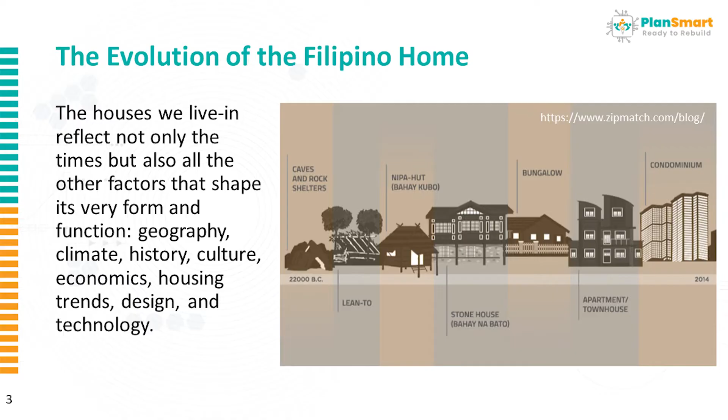Our homes today are shaped by different aspects of geography, climate, history, culture, economics, housing trends, design, and technology. For the caves and rock shelters, these were used by ancestors who moved from one place to another depending on the reason.

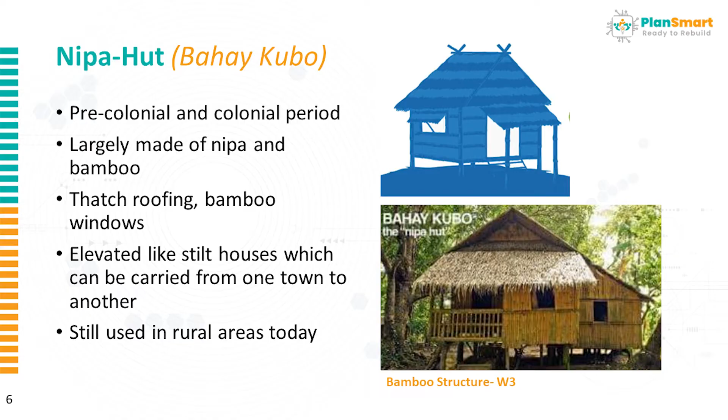The nipa hut or bahay kubo belongs to the pre-colonial and colonial period. The materials are largely made of nipa and bamboo with thatch roofing and bamboo windows. The bahay kubo is distinct because the floor is elevated from the ground like stilt houses, which can be carried from one town to another. It has a tall and steeply pitched roof ending in long eaves.

It has a silong to create a buffer area for rising waters during floods and to prevent pests such as rats from getting up to the living area. So even back then, our homes were already prepared for flooding. Oftentimes, the silong is used for storage, sometimes for raising farm animals.

The walls or dingding of a bahay kubo are designed for air ventilation. Since they're made of bamboo, the walls tend to let some coolness flow naturally through them during hot times and keep warm during the cold, wet season.

The bahay kubo has large windows to let in more air and natural light. They are designed as large awning windows, held open by a wooden rod.

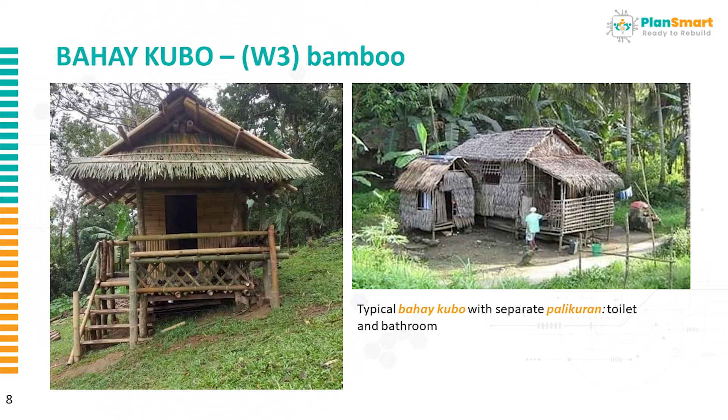A bahay kubo made of pure wood or good lumber can be considered a W1 type structure. Wood is the most common material in the Philippines since it is flexible, durable, and easy to source locally.

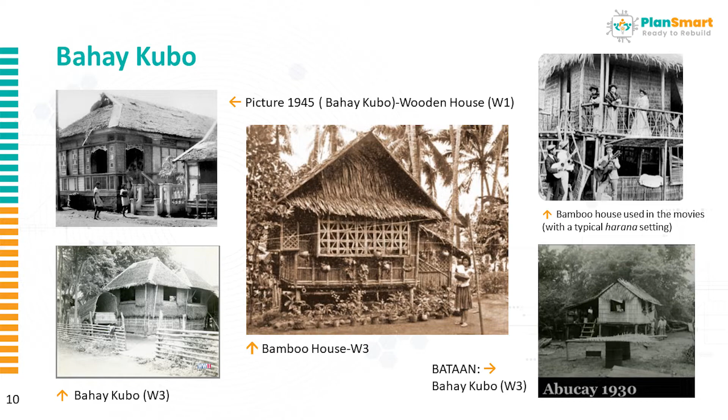Kaya naman ginagamit din ito as background sa mga pelikula, example makikita dito ay pelikula na nagkaroon ng harana o hinaharana yung dilag. Ang bahay kubo sa Abukay, Bataan, noong 1930, kung saan makikita ang pagbisita ng mga Amerikano at ang mga nasa bahay ay nakadungaw lang sa bintana habang nakikipagkwentuhan.

Stone house or bahay na bato. The arrival of the Spaniards in 1571 brought European colonial architecture to the Philippines. Gumagamit sila ng mga bato bilang pundasyon ng bahay at masonry stone or bricks bilang wall sa first floor, at kahoy naman sa pangalawang palapag. Ang bubong ay gawa sa tile at ang mga bintana ay gawa sa kapis shell.

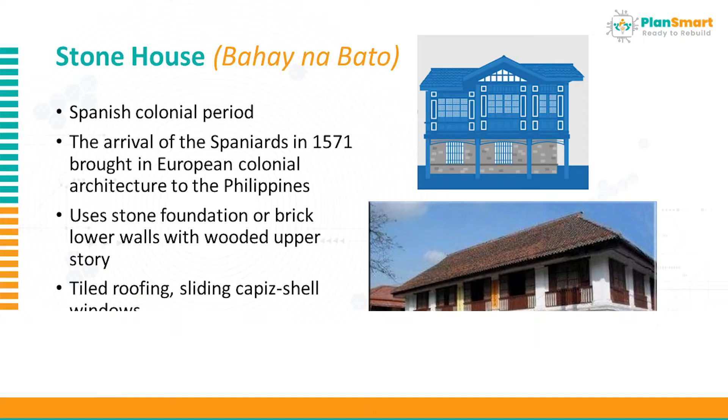Bahay na bato is also a symbol of status at the time, used by the local middle class and government officials. Spanish era, 16th to 17th century, bahay na bato is influenced by European style. Dinala yan sa atin dito ng mga Spaniards.

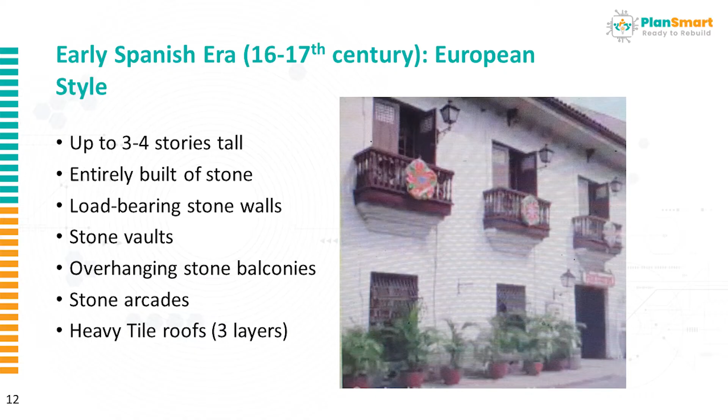Designed up to 3 to 4 stories in height, entirely built of stone, a load-bearing stone masonry walls with overhanging stone balconies, stone arcades and heavy tile roof, mga 3 layers yan. But the 3 to 4 stories European design na bahay na bato was not appropriate to the Philippine setting. Makikita yan sa paglindol noong 1645 with a magnitude of 7.9, triggered a rethinking of urban architecture and civil engineering.

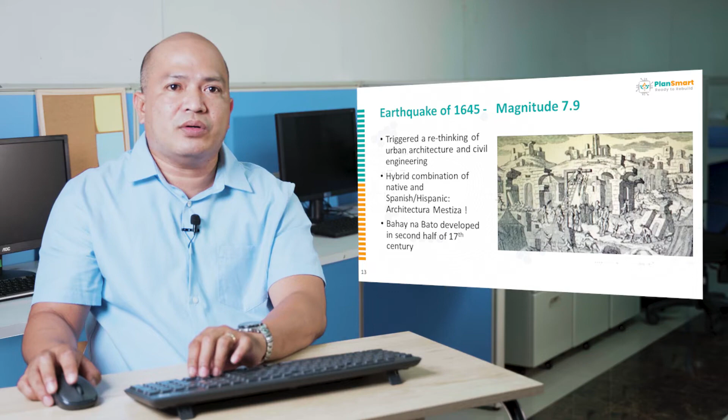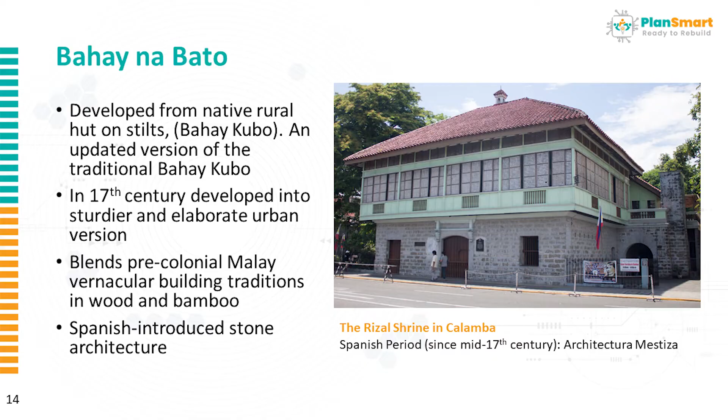A bahay na bato, redesigned, was developed in the second half of the 17th century. A bahay na bato that exists today developed from the native rural hut on stilts or bahay kubo concept. An updated version of the traditional bahay kubo in the 17th century developed into a sturdier and more elaborate urban version. So, the Spanish introduced stone architecture.

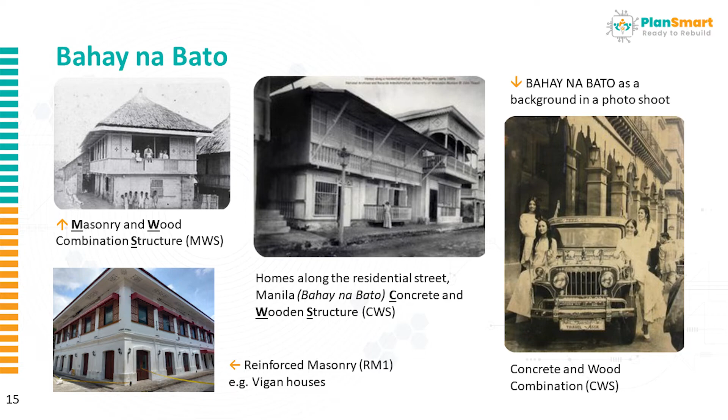Meron tayong mga strengthened masonry called reinforced masonry or RM1. Ang example niyan ay yung sa mga Vigan houses.

Bungalow is from the American colonial period, a low-rise structure with a pitch roof and horizontal in shape. Typically with metal roofing, galvanized iron or GI, cemented walls, and has its own gate for security. It may come with a yard, a garden, and a parking space.

The bungalow is the most common type of house in the Philippines. The design is also perfect for the elderly because it is small, easy to maintain, and does not have flights of stairs. It comes in different forms in different provinces across the country. So ganito ang mga common na bungalow dito sa Pilipinas.

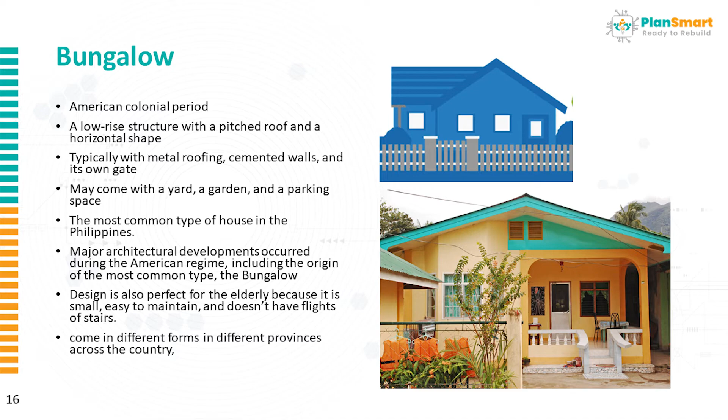The basic elements of a bungalow are gable roof or aguas. Meron dyan media aguas, cuatro aguas, mga high-end subdivision. Truss or yung

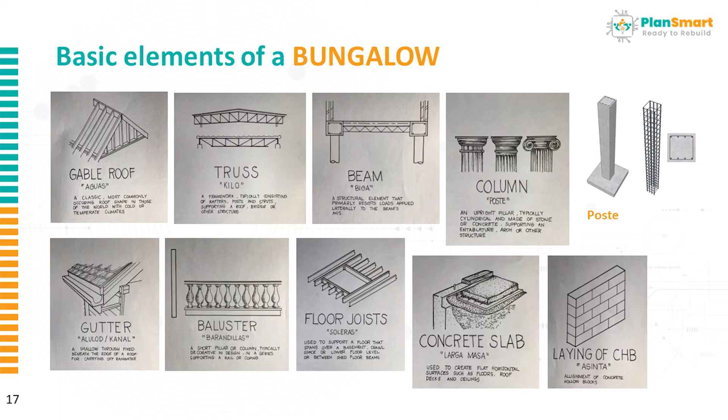ginagamit sa bubong or kilo, beam or biga, column or poste, gutter or alulod or kanal, baluster or barandillas, floor joists, concrete slab, at yung wall ay yung tinatawag na concrete hollow blocks. Sample of bungalow, if it's a wooden house, is W1.

A wood house is perfect for country living. It gives you an image of growing your own garden in a gorgeous setting. Sample of a bungalow for a wooden house, W1 and W2. Marami pa rin sa probinsya yung ganito, wooden house, 2-story, at yung mga elevated wooden house natin, W1. Influence ng Americans ay yung mga rustic home, W1, or cozy bungalow house.

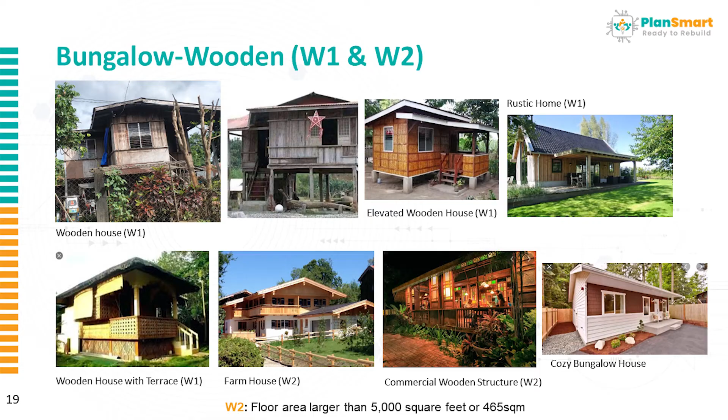Kapag naging W2 ang wooden house, the floor area is larger than 465 square meters, or ginamit siya for commercial or wooden structure. Sample of bungalow, reinforced concrete houses.

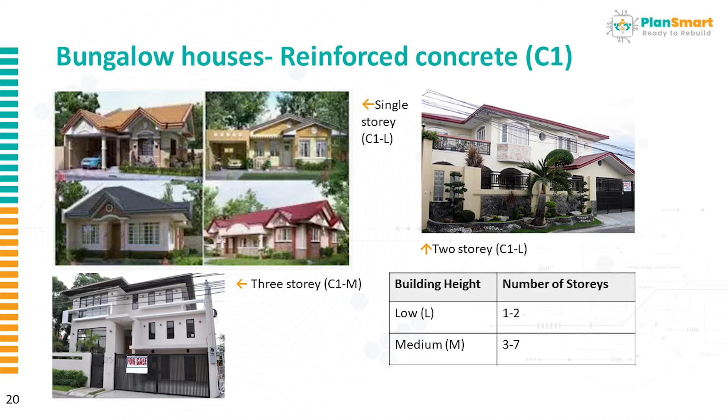Meron po tayong mga single story, common po yan sa mga subdivisions, iba't ibang design, iba't ibang kulay. Single story is C1L. Meron din po tayong tinatawag na 2-story, C1L. Ibig sabihin ng L ay low-rise, or 1 to 2 stories. Meron din po tayong 3-story, which is already C1M.

Sample of housing development, residential. Iba't ibang uri po yan. R1, economic housing, single detached.

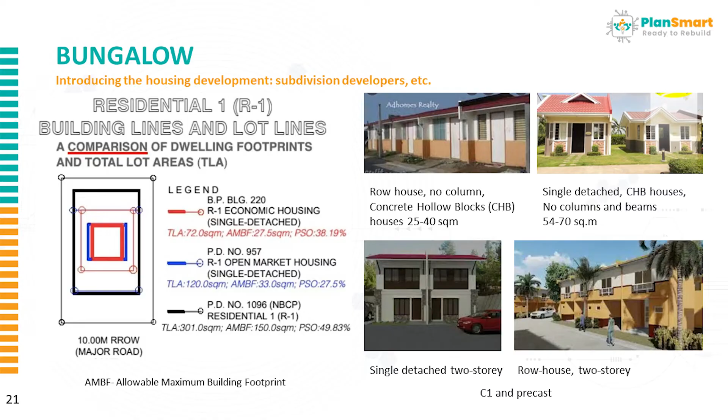The total lot area is 72 square meters, and the allowable maximum building footprint is 27.5 square meters. We also have PD Number 957, or R1 open market housing, single detached, with an allowable maximum building footprint of 33 square meters. And there's Presidential Decree 1096, or the National Building Code of the Philippines for residential, with an allowable maximum building footprint of 150 square meters.

That's why before, we could still see many large lots here in Metro Manila. So row house, no column. Only concrete hollow blocks were used, either interlocking with an area of 25 to 40 square meters. Single detached, no columns and beams, 54 to 70 square meters. There's also single detached that's 2-story, and row house.

So bungalow for high-end subdivisions and executive villages for private developers. These are our high-end homes. A reinforced concrete C1L, 2-story house for subdivisions and executive subdivisions. We have high-end homes, really, and C1 houses, like in Forbes Park, Urdaneta Village, Dasmariñas Village, Ayala Alabang, Corinthian Garden, and Valle Verde, Pasig. That's how big they are. The price of just one house in Forbes Park is 875 million.

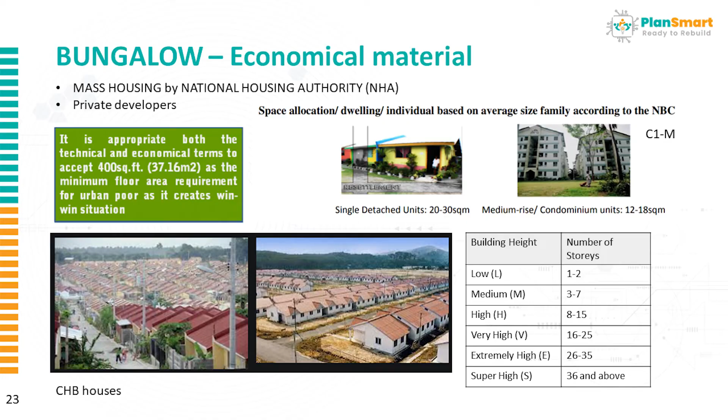So we have bungalow, economical materials, mass housing by the National Housing Authority. It is appropriate in both technical and economical terms to accept 37.16 square meters as the minimum floor area requirement for the urban poor, as it creates a win-win situation.

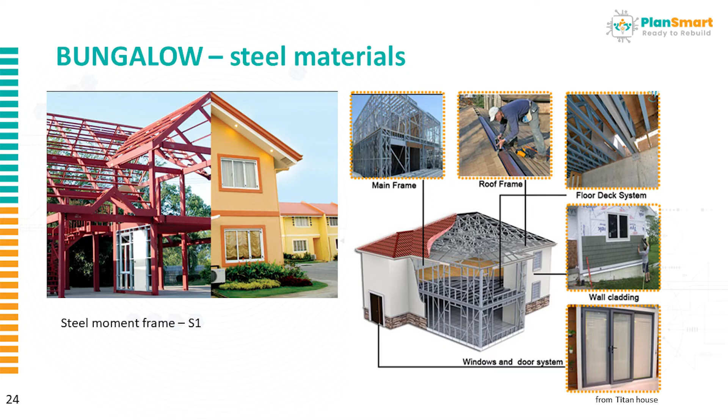So here we have Bahay Kalinga, single detached, 20 to 30 square meters. There's also LGU pabahay, medium rise condominium, 12 to 18 square meters, type C1M. And mass housing, either private developer CHB houses. We have bungalow for steel materials, called S1 or steel moment frames. Nowadays, steel is becoming cheaper comparable to reinforced concrete, and an increasing number of houses use steel.

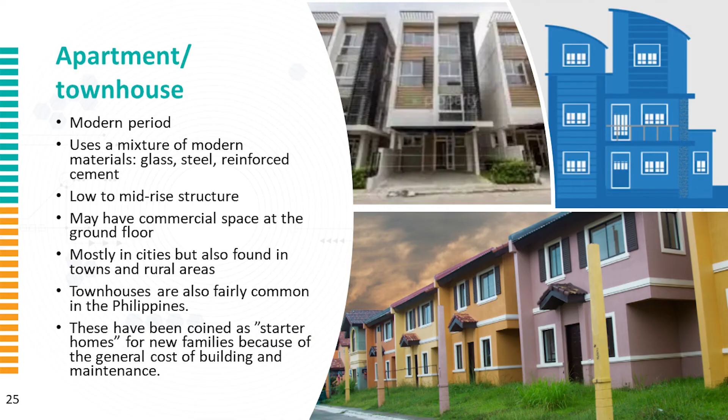Apartment houses or townhouses are from the modern period. They use a mixture of modern materials such as glass, steel, and reinforced cement, with heights ranging from low to mid-rise structures. Many have commercial space or parking at the ground floor, constructed mostly in cities but also found in towns and rural areas. These have been coined as starter homes for new families because of the general cost of building and maintenance.

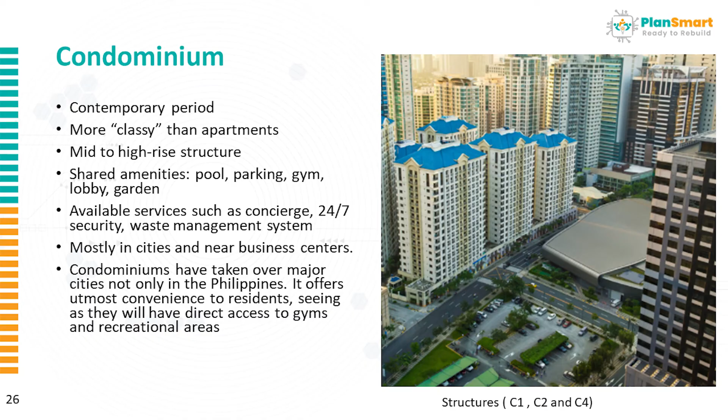Condominium was developed in the contemporary period. It is more classy than apartments, with heights ranging from mid to high to super high structures. It has shared amenities such as swimming pool, parking, gym, lobby, and garden. Condominiums have taken over cities, not only in the Philippines, offering utmost convenience to residents since they have direct access to gyms and recreational areas.

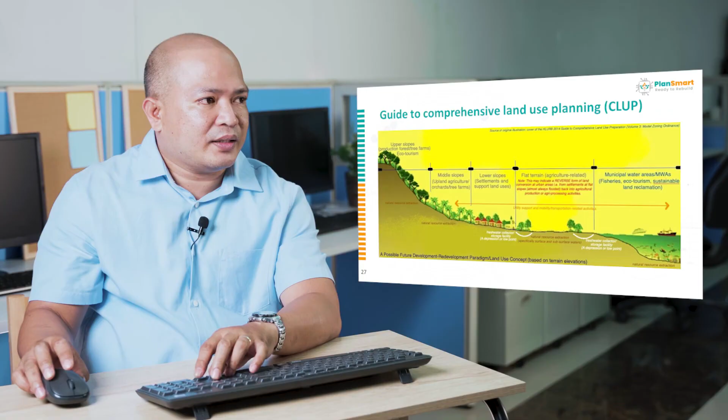Urban and rural developments must follow the Comprehensive Land Use Planning, or CLUP. Upper slopes are for production forest, tree farms, and ecotourism. Mid slopes are for upland agriculture and orchards, tree farms. Lower slopes are for settlements such as housing and support land uses—this is where subdivisions and homes are really built. Municipal water areas are for fisheries, ecotourism, and sustainable land reclamation.

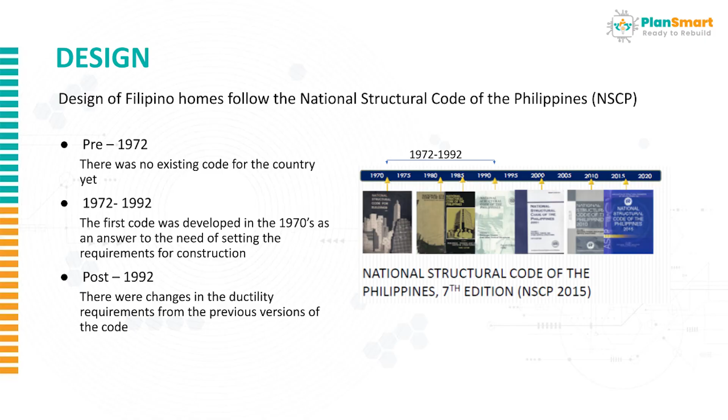Design of Filipino homes follows the National Structural Code of the Philippines, or NSCP. So we need to database our houses for pre-1972, when there was no existing code yet for the country. In 1972, the first code was developed in the 1970s, after the Casiguran earthquake of 1968, as an answer to the need for setting requirements for construction. It lasted until 1992. Then there was an earthquake on July 16, 1990, which prompted changes in ductility requirements in the previous code. So we have this era of post-1992.